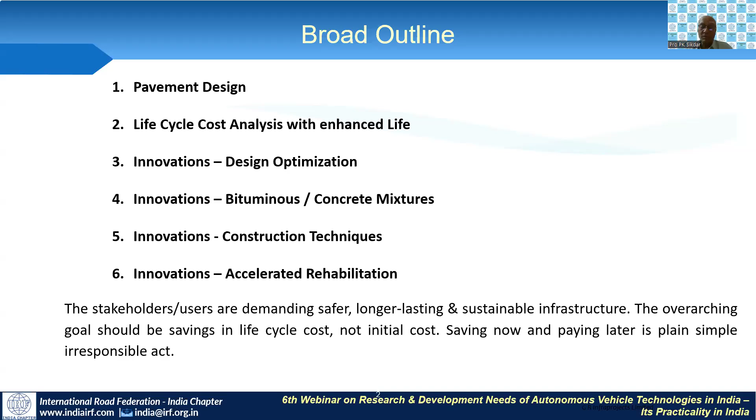There is a paradigm shift, it appears, that we are thinking only of economizing the initial cost of construction, regardless of the life cycle cost. We should not do that. Saving now and paying later is a plain, simple, irresponsible act. So we should be responsible engineers and think of the life cycle cost instead of the initial savings in the cost of pavement.

So in 2001, the ME design approach incorporating material properties came in, and we started using stabilized pavements in 2010, then in 2013 use of alternative materials, then 2014 use of falling weight deflectometer. That's how the upgradation in pavement technologies went.

In 2014, we started using the foam bitumen technology, then in 2015 the use of RAP, though in a small scale, using small dosages, it came in, then cold recycling, hot recycling came in 2015 only. Then in 2019, expansion in the usage of geosynthetics when IRC SP 59 was revised and came in.

Then in 2019 only we started the construction of long life or perpetual pavement. Then in 2022, we started the construction of high dosage RAP. Till date we had been thinking about up to 30% recycling, but then we started recycling 50% to 60% in hot recycling. And in flexible pavement, the geosynthetic reinforced pavement and bonded rigid pavement got constructed successfully from 2022 onwards.

Now the latest practices under construction, we have almost forgotten the conventional pavement of BC, DBM, WMM and GSB, that is almost a gone era now. Now what we have is high RAP dosage, that's the recycled DBM. BC we are not yet recycling, but recycled DBM under the flexible pavement system.

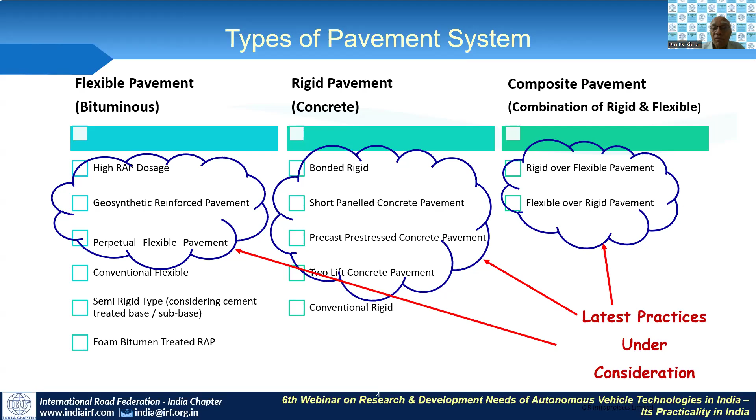Rigid pavement also, we are doing bonded rigid, then short panel concrete pavement, precast, pre-stressed concrete pavement, two-lift concrete pavement, besides the conventional rigid. Then composite pavement, we have rigid over flexible pavement, then flexible over rigid pavement. These are the combinations going on in the industry.

And there's an endeavor in pavement sustainability in terms of rehabilitation, because we are just building kilometers and kilometers of roadway, and widening also we need to take care of. Rehabilitation during widening needs to be taken care of, as Professor Veeraragavan mentioned, that widening like 4 to 6 laning, 6 to 8 laning, 2 laning to 4 laning or 6 laning, this should be taken care of with a holistic approach towards rehabilitation of the existing lanes also.

So we have bituminous on bituminous pavement, that's IRC 115, concrete on concrete IRC SP 17, a whole lot of codes are there. IRC SP 76 on concrete on bituminous, then bituminous on concrete pavement is under development. I just drafted the code yesterday and sent it to IRC. Hopefully it will come through. Cement grouted bituminous macadam, that's IRC SP 125, reinforced overlay using geosynthetics SP 59, then microsurfacing SP 81.

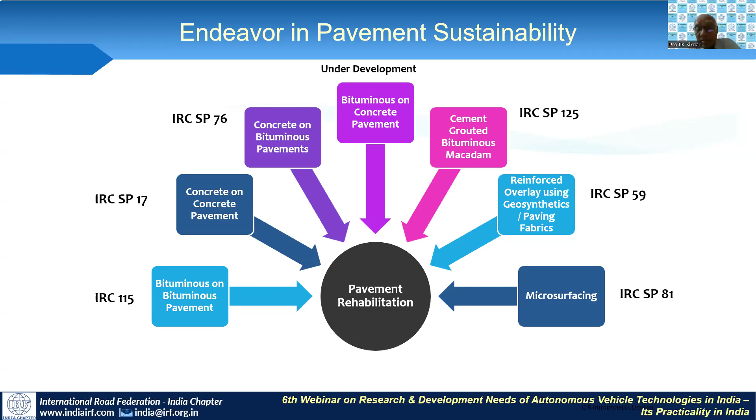Now coming towards the design aspect. Are we attacking everything with a holistic approach? Well, let us delve a little bit. January 2024 traffic data we have, and we have supportive traffic data also. Let's study one of the vehicles plying on Indian roads in the states of UP, Bihar, Chhattisgarh and so on.

It's a sand commodity, and the vehicle type of multi-axle vehicle is 1.22.22, and I have shown in the figure also, it's a 5-axle tractor semi-trailer. So the load it is carrying is like 96 tons, and the VDF which is coming is 131.68.

Is our flexible pavement capable of taking these high VDFs? No, our design is not catered towards designing such a pavement which has a VDF of 131.68. And what is the legal axle load limit? If we go by the legal axle load limit for this same truck, it is 8.77. So there are questions for many. Will our pavement, flexible pavement, or even for that matter perpetual pavement, sustain this kind of loading?

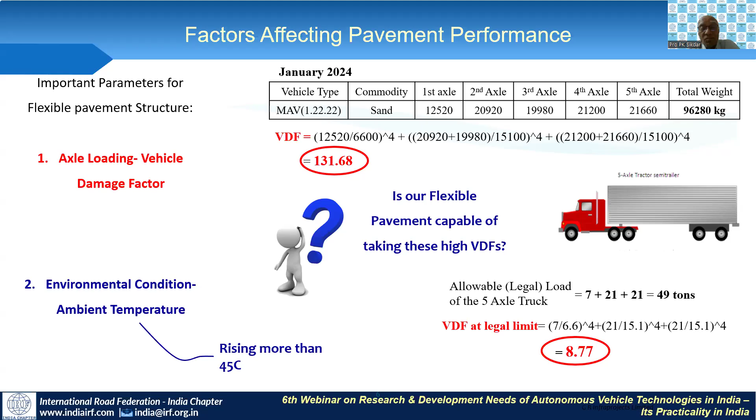And parallelly, the environmental condition like ambient temperature is rising more than 45 degrees centigrade. So there are so many areas where we need guidance from the academia.

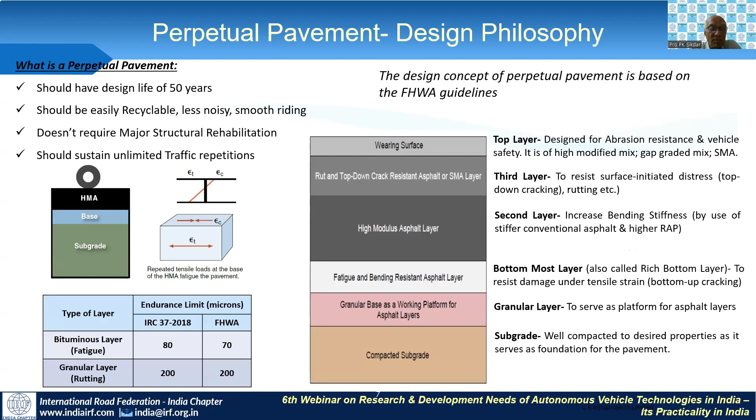The perpetual pavement design philosophy won't be covered in much depth here, since the next lecture from Professor Nikhil Saboo will already cover this. But again, we don't have any instrumentation done in India. These microstrain endurance limits have been fixed based on foreign countries, giving some attention to the overloading factor, but not necessarily as per instrumentation done in India. So in the name of perpetual pavements, many types have been constructed in India since 2019, and more innovations are coming.

These perpetual pavements aren't exclusive to India, but we Indians are really innovative. But are these actually truly perpetual pavements? Well, this will be covered in the next lecture. But why have we been innovative? Let me walk you through the cost.

The main components are the wearing course, then binder base course, and we have 3 layers of bituminous courses. Then we should have the WMM, that's the granular base course, and then the granular sub-base course, the subgrade. This is what should go on as a perpetual pavement across the world and across India as well.

But we have been innovative. We have made CTSB, the GSB, as a cemented layer. We have been further innovative, and constructed the WMM as CTB also. So it has come down to only the wearing coat, then only 2 layers of DBM, and then the CTB, the CTSB, the subgrade. Well, is it truly a perpetual pavement?

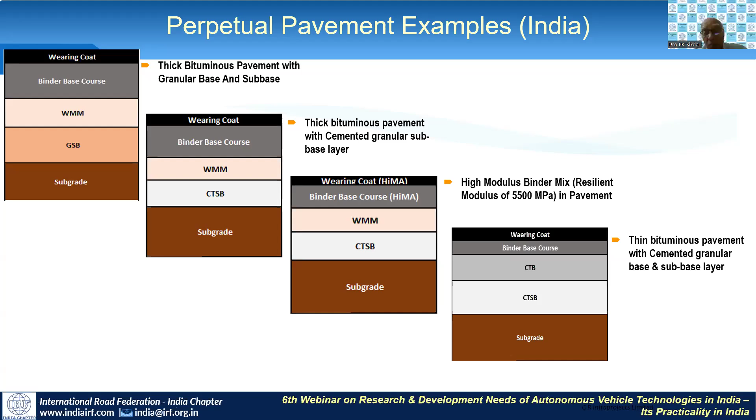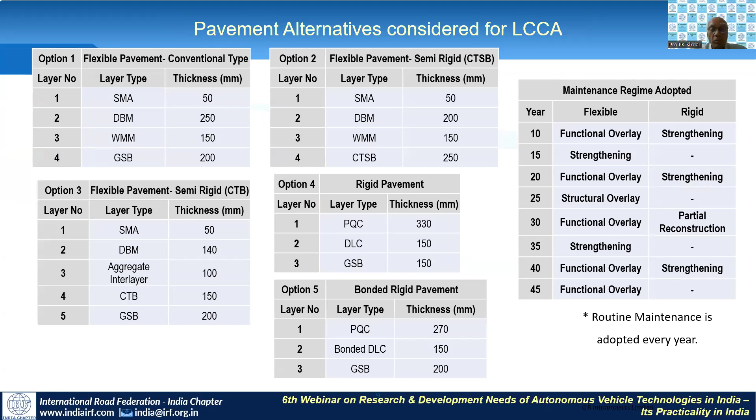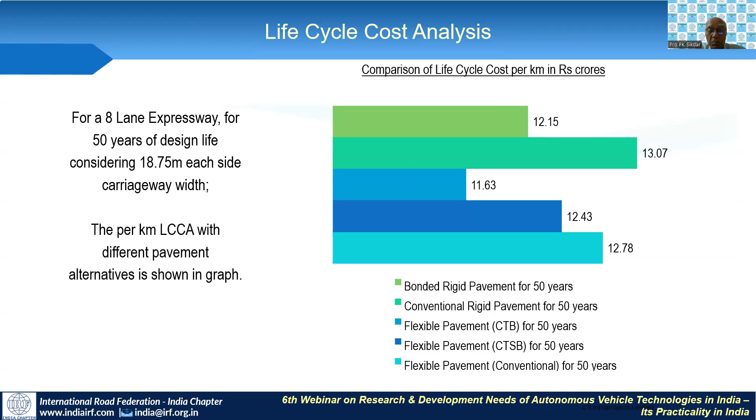And then the bonded rigid pavement for 50 years, conventional rigid, flexible pavement with CTB, flexible pavement with CTSB, flexible pavement conventional. Comparing all of this, we see that the CTB, CTSB layer, the innovative layer, comes out to be the cheapest. And that's why people went for a perpetual pavement with this configuration, because even in life cycle cost, it came out to be the cheapest.

Now comparing initial cost and life cycle cost, because we should be more attentive towards the life cycle cost rather than the initial cost. Again, this is the cheapest. In initial cost of construction also, we have the innovative perpetual pavement with CTB and CTSB as the cheapest, the third one from top, with 262.25 crores. So people went for it.

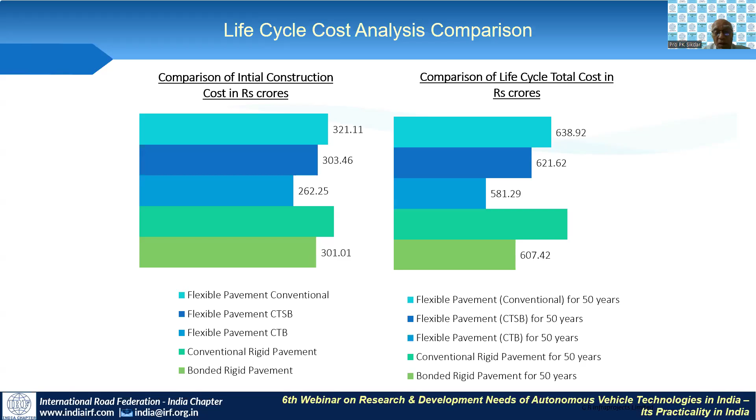Now coming to the quality tests we have done on these, we followed a strict quality regime for the success of these pavements. It's not easy to construct SMA because technical know-how was very limited when we constructed these pavements, but we made it a success, and till now they are performing well.

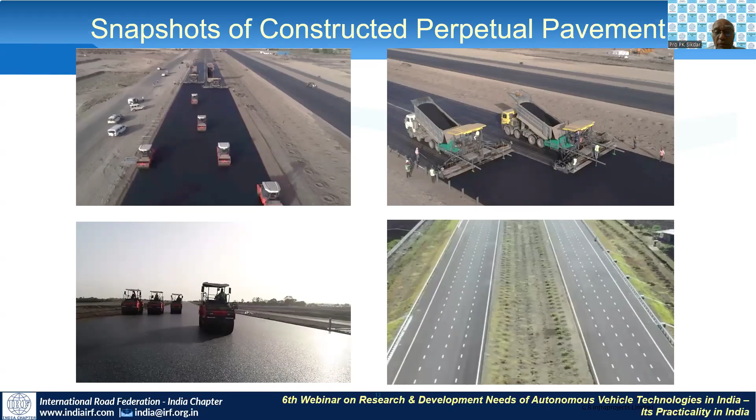Now coming to the next type of pavement, which is the geosynthetic reinforced flexible pavement. When we moved out from the conventional system of BC, DBM, WMM, GSB, the cheapest option other than that, for any type of pavement, not just perpetual pavement, came out to be BC, DBM, WMM, and CTSB.

That's the semi-rigid form. But these days we have another cheaper version, with BC, DBM, reinforced WMM, and then GSB. But yet again, another cheaper version came out, which is BC, DBM, reinforced WMM, and then CTSB. But are these pavements again true to the sense of meeting the service life and design life? Well, time will tell, because we don't have long-term performance data in India yet.

The design concept of the geosynthetic reinforced pavement is the same as that of the conventional pavement system, but with the introduction of the geogrid, we are giving some form of lateral restraint, improving the bearing capacity, and easing out the load transfer in a wider base.

The granular base of the WMM layer is weak in tension, or it cannot take tension. So we are introducing a tensile element, the geosynthetic or biaxial geogrid, so that it can resist the forces. That is what it is doing.

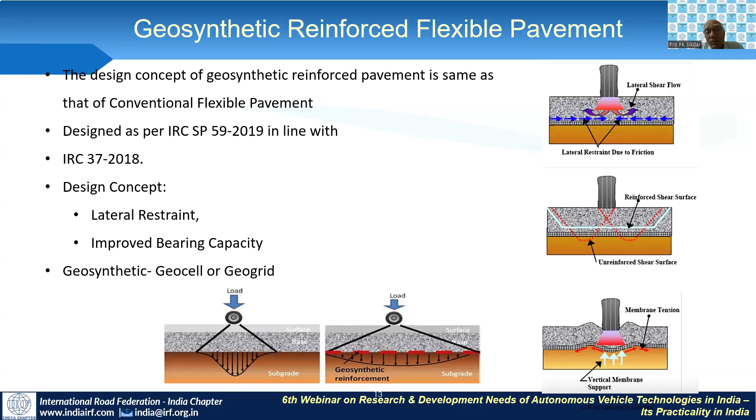But whether it was the true essence of design, well, time will tell, because the performance history is still not there. So what is the construction procedure of the geosynthetic reinforced WMM layer?

Usually, when the economics work out, it is laid in between the GSB layer and the WMM layer. So the procedure is: preparation of GSB for placement of the geogrid, then placement of the biaxial geogrid layer over the prepared GSB, then nailing of J-hook pins to keep the geogrid in position, then laying and compaction of the WMM layer.

Sometimes wrinkles form, and we have to either lay the WMM in 2 layers or be innovative to work with the wrinkles if they form. Then we have the compacted WMM layer, and the rest of the construction is like normal conventional pavement.

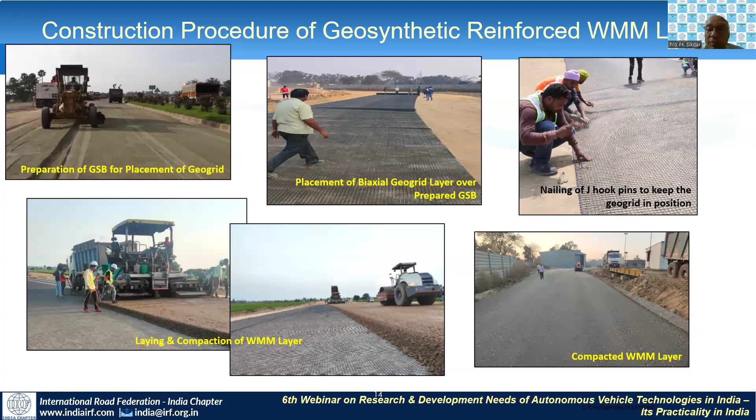So what is the quality assurance test plan during construction of the geogrid reinforced pavement that we must have, which is being neglected in the industry these days?

Plate load test should be done at the points marked, like the red points I've marked. There should be a control section, and we compare when we get the values of the MR of the control section, and then we introduce the geogrid in the reinforced sections. If we have one layer of geogrid in between the WMM and the CTSB on the left side, we have to measure the plate load test results at 3 points.

When we have 2 layers of geogrid, say our subgrade is poor as well, we can improve the CBR value as well. Then again we need to conduct the plate load test at 3 points. And we repeat this during the execution process also.

Sometimes we may not have the same quality of geogrid supplied to site, and the MI value, the modulus improvement value, may vary. So we need to keep doing this quality checking all the time during execution, to check if our design meets the execution parameters or not. That is a stepping stone towards performance, and if we don't do it, our performance may be hampered.

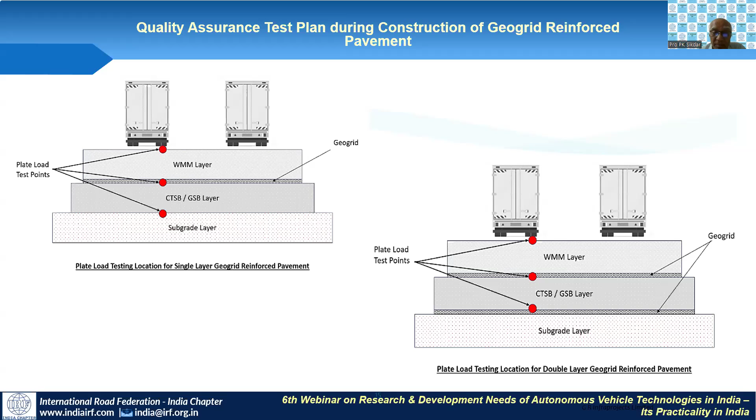Now coming to high RAP dosage by hot in-plant recycling. As I said, from 2022 onwards, recycling of more than 30% came into being, because nowadays the HMP plant produces bituminous mixes with fresh aggregates or a mix of fresh and RAPM, that's the recycled or reclaimed asphalt pavement material.

In India, bituminous mixes are produced with a ratio of 70 to 30. As I said, 70 to 30 is the norm, and with normal plants we can produce this. High RAP is still not regular engineering in India due to the special bituminous batching plant requirement. Based on the intended dosage and type of recycling, different plant setups are available.

If we want to recycle 60% of the existing material, that's usually for a brownfield project, it normally won't happen for greenfield projects. But if it is a brownfield widening project, then we will have ample reclaimed asphalt material available from the existing bituminous surfacing.

What happens is that we have to engage one parallel flow drum, so that we heat up the RAP separately.

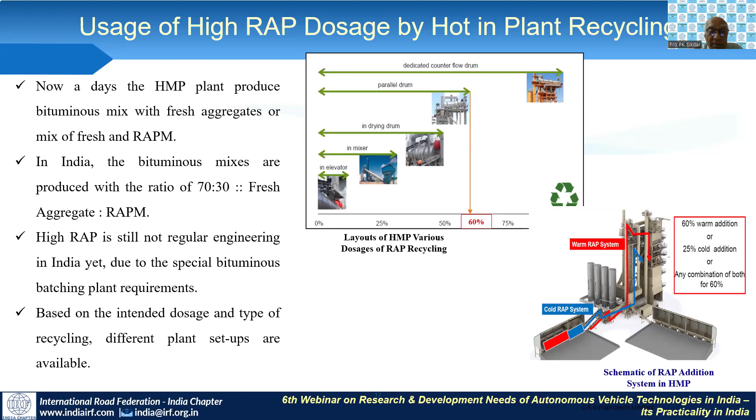This is the process we follow for usage of high RAP dosage by hot in-plant recycling. First of all, two-step milling has to be adopted, not necessarily always, but if you have a thicker existing pavement, then you follow two-step milling. The first milling is done on the top 50 mm bituminous concrete, and the other milling is done in the bottom bituminous base course, usually 100 mm or more or less.

The milling from the pavement layers is further screened into sizes and stored in bins. Storage bin and RAP storage management has to be done very meticulously, so that there is no moisture ingress. Steps for a quality RAP product: two-step milling, then crush or screen the RAP, stockpile the RAP, test the RAP as stockpiled, use the RAP, then test the RAP as consumed.

There are so many steps if we want to recycle. For milling drums also, for two-stage milling, we use fine milling with micro-fine milling drums and coarse milling with standard milling drums.

What we do is RAP is heated in a different barrel, like the parallel drum used for high RAP mixes. Then the heated RAP is added with heated virgin aggregate in the pug mill. They do not mix beforehand; they are transported through different conveyor belts and heated at different temperatures in different barrels, and they mix at the pug mill.

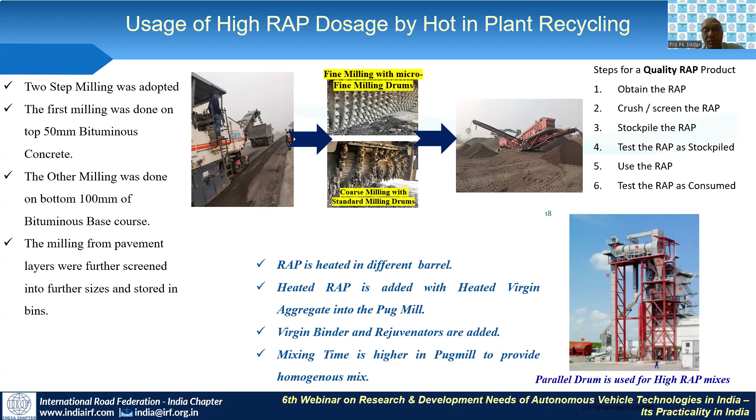Virgin binder and rejuvenators are added in the pug mill only, and mixing time is higher in the pug mill to provide a homogeneous mix. Normally, when we are not recycling, the mixing time in the pug mill is usually 18 to 20 seconds. But if we are using high dosage, 60% old materials, then the mixing time has to be increased to about 30 seconds, to give good time for the existing materials in the pug mill, for the rejuvenator to do its work.

Now the flowchart: this is where the distressed pavement is there. Not necessarily it has to be distressed, because when we are widening, it may be good material. We can get some fresh materials as well.

Then milling of the distressed pavement or existing pavement, then screening of the milled material, then stockpiling the RAP, laboratory testing and mix design has to be done meticulously. Then plant production, transportation of mixes, laying and compaction, and freshly laid pavement.

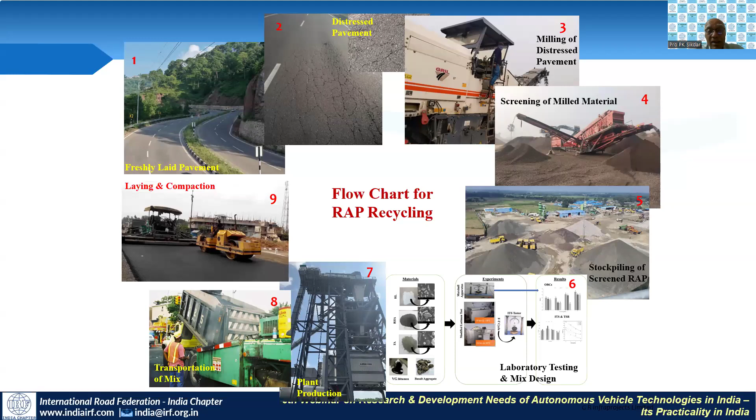There are some temperature categories that need to be followed when doing all this recycling process. IRC 120 doesn't cover everything, but it touches upon many of the things. We need to upgrade 120 also based on our experiences soon.

These are some pictures of where we laid the trial patch, and under the guidance of Professor Nikhil Saboo, he did the mix design, the high dosage RAP design for us. We can say it looks as good as a new surface.

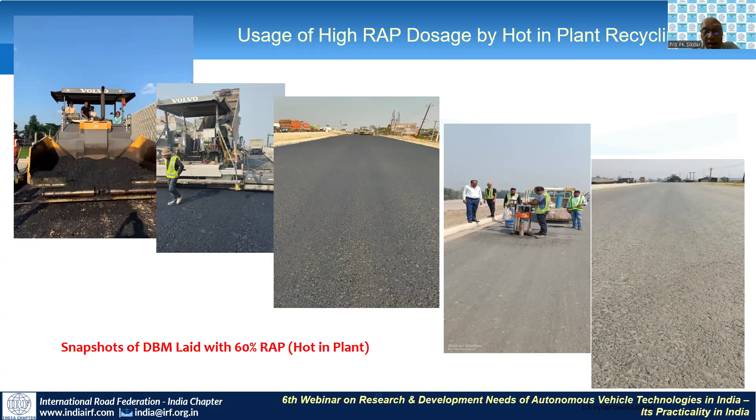You can see from the third picture that there is no difference, as if it is a fresh material. It's a very good surface that ran traffic for 1 year before we laid BC. There is no problem at all.

Now coming a little bit to cost comparison for the conventional process, I'll rush a bit due to time. In essence, the advantage of the separate mixing plant is that the bitumen film will not be overheated and damaged. Recycling temperature at the dryer outlet is around 130 degrees centigrade, and use of the screen is not affected.

So the essence is that for 60% dosage recycling, you need to spend a little on the plant. For this parallel flow drum, you need to invest about 5 to 6 crores. But there is an ultimate gain: you need not buy 60% of your aggregates, as they will be your fresh purchase. We can reduce the bitumen content from 4% down to about 2.2% fresh bitumen purchase. So ultimately, savings per ton of mix production to the tune of 700 to 800 may be expected, depending on the aggregate price.

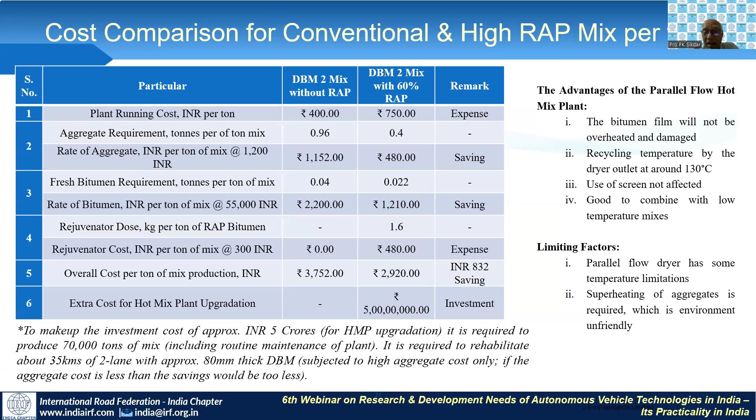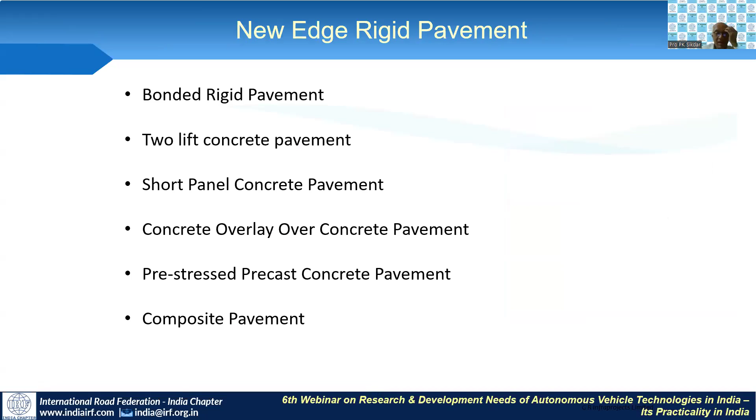Now, coming to the new age rigid pavements, we have constructed bonded rigid pavement. Two lift concrete pavement is in the planning. Short panel concrete pavement also we have laid. Then concrete overlay over concrete pavement, pre-stressed precast concrete pavement, composite pavement. These are the new age rigid pavements now.

Now, conventionally the rigid pavement we have mostly seen throughout is 300 mm of PQC, DLC is 150 mm, GSB is 150 mm, and the panel size is like 4.5 meter by 3.5 meter.

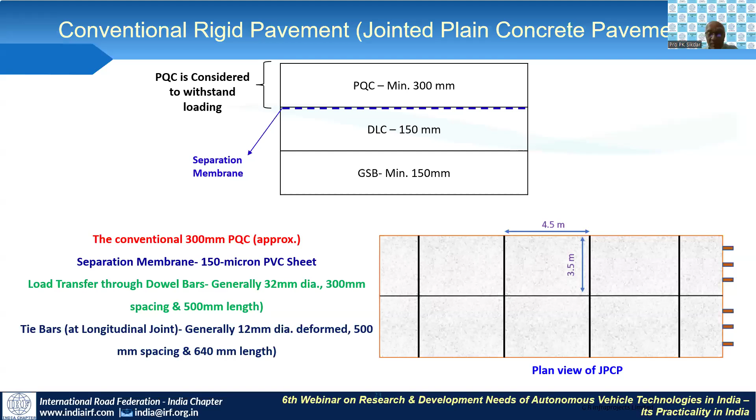Now, what is the bonded rigid pavement? What we are doing is that instead of DLC and GSB, DLC, GSB, and subgrade considered as the foundation for a conventional rigid pavement. But for a bonded rigid pavement, GSB and subgrade are considered as the foundation.

And because PQC and DLC are mechanically bonded to behave monolithically, we can economize on the PQC thickness by 60 mm. It depends on design. It could be 60 mm, 70 mm, 80 mm. It's not that it necessarily gives an economical pavement design, but it definitely saves the cost of the cement and all.

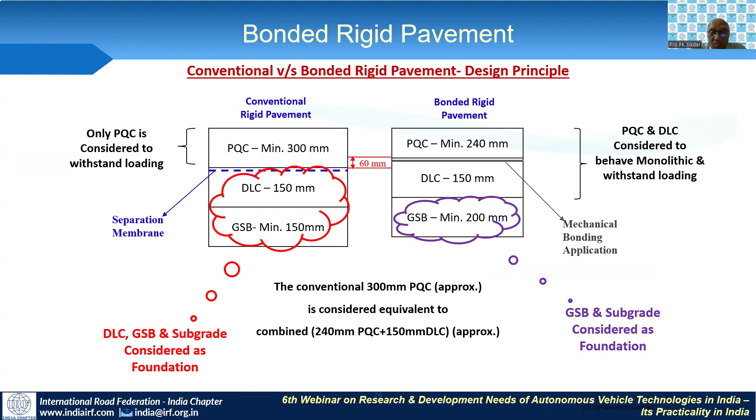So preparation of the GSB bed, this is the methodology. The methodology of construction of bonded rigid pavement is most important. And after the preparation of the GSB.

Your voice is breaking. I mean, it's not continuous.

The internet is a little bit unstable. Sir, is it okay now? There's a breakage. Yeah, yeah.

It's okay. Then we do the joint cutting and sealing in the DLC, which is not there in the case of the conventional pavement. Then the laying of the PQC, and in the PQC, we match the joints exactly in the same location where we have cut the joints in the DLC. This is very important. Otherwise, bonded rigid pavement won't be a success.

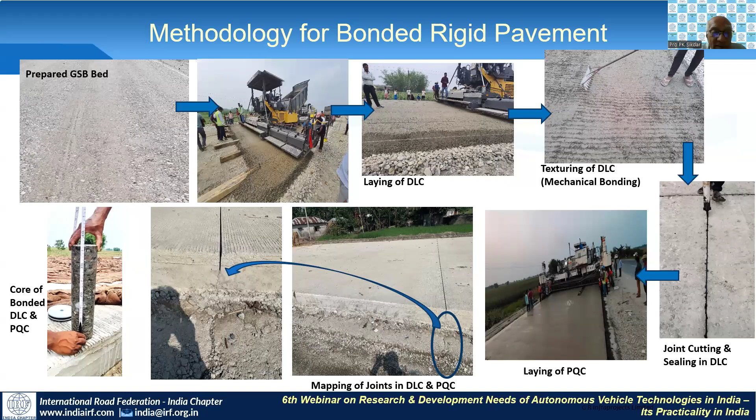Now, these are some of the constructed pictures. We cannot make out from the core which one is M15 grade of concrete and which one is M40 grade of concrete. If the bonding is good, you cannot even make out.

And coming to the short panel concrete pavement, I won't say that you can economize, but again, there will be a saving in terms of environment, because the M40 PQC will come as 260 mm and the panel sizes will be 1 meter by 1 meter.

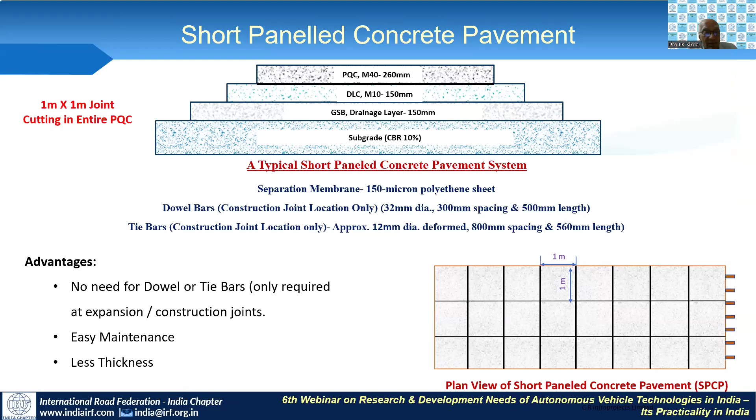What are the advantages? No need for dowel or tie bars, only required at expansion or construction joints, easy maintenance, less thickness. But the only disadvantage is that if you lay 300 of short panel concrete pavement in a day, then joint cutting machines have to be doubled. If you were needing like 5 cutting machines, you would need now 10 cutting machines to do the timely joint cutting because of the 1 meter by 1 meter panels.

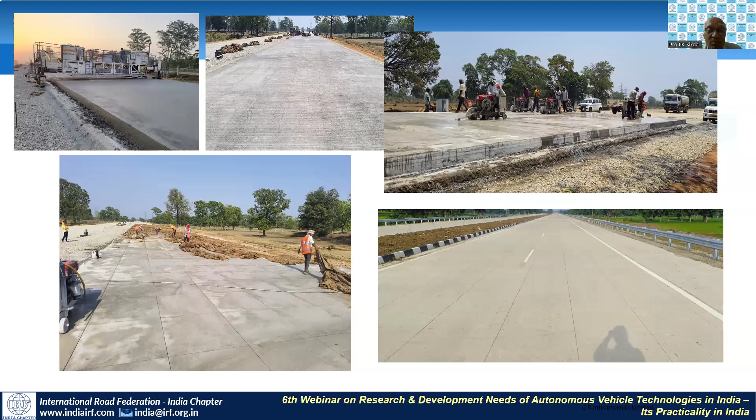But again, steel is saved here. So this is the short panel concrete pavement.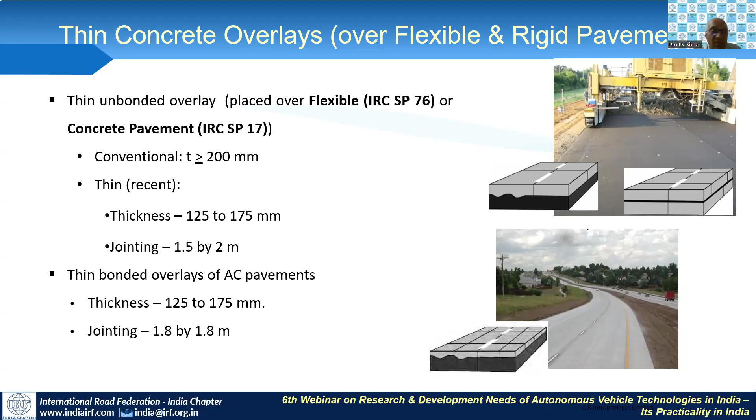Now, coming to the thin concrete overlays for flexible and rigid pavement, we have white topping, and we can construct thin concrete overlay both on flexible pavements and rigid pavements. In some of the RFPs now, it is coming with white topping in terms of rehabilitation. We haven't constructed it yet, but this is very much prominent in Maharashtra and in Bangalore, it has been constructed. Now, these are some snapshots of unbonded overlay over existing concrete pavement with fabric interlayer.

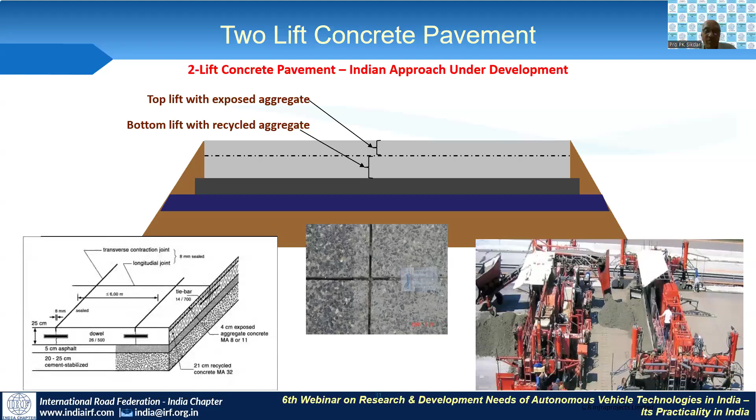And two-lift concrete pavement is to maximize the use of recycled material, as I said, we are doing with the high dosage RAP in DBM. So we are thinking to use these materials in concrete pavement as well.

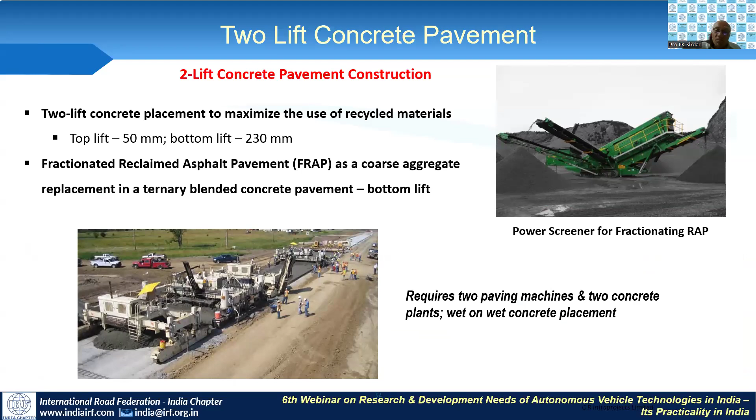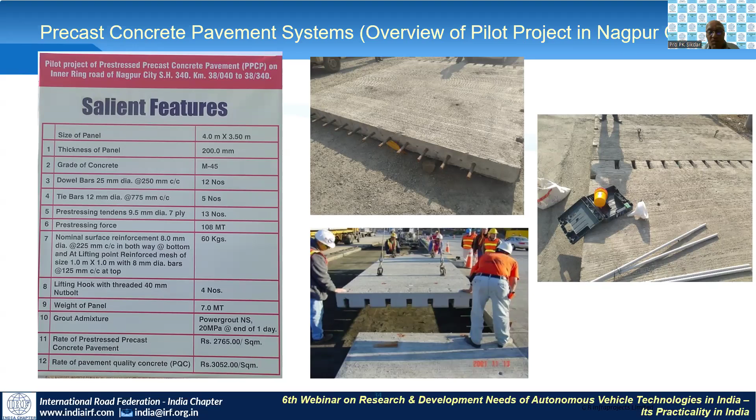Now, precast concrete pavement technology. Again, this is an expensive thing, but in built-up areas, some areas in Nagpur and all, it has been constructed. The precast concrete pavement requires precision work because of maintaining the camber and all. We are still thinking whether to engage the precast concrete pavement somewhere or not.

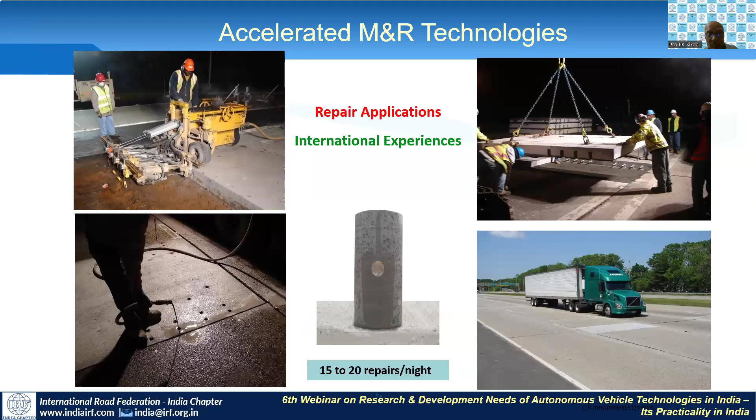And now, accelerated maintenance and rehabilitation technologies, it is being used internationally, the experiences are there. Where repairs are needed, we can go for these precast pre-stressed concrete pavements.

And so that's all. Hope I maintained the time. That's all from my side.

Thank you, Atasi. I think you have shared a wide variety of new materials and technologies that are used. Perhaps I would have expected your sharing of experiences of the perpetual pavement constructed by GR and the issues and challenges. That is what we are looking forward. Anyhow, he has shared a wide variety of materials and technology that can be adopted. However, the issues of maintenance, preservation, management, lifecycle cost for all the technologies will be a real challenge.

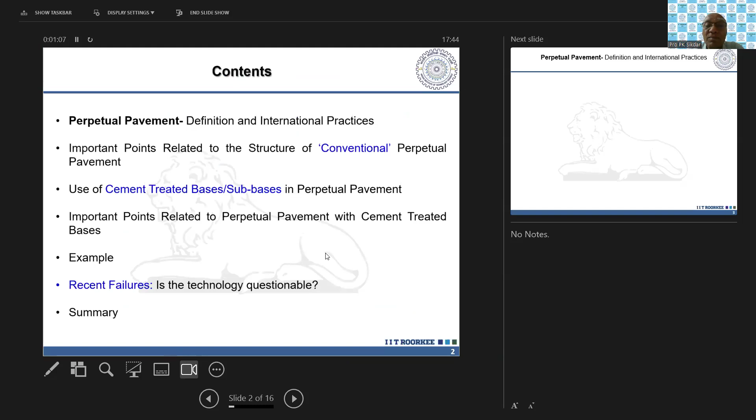Let us first recall the basic definition of perpetual pavement. Professor Veeraragavan already defined it in the beginning. In very simple terms, a perpetual pavement is a pavement which will have a design life of more than 50 years. Now, what does this mean? It essentially means that the choice of pavement crust should be such that it can take a significant amount of traffic repetitions before showing distresses beyond critical limits. Such pavements ideally should require only minor maintenance activities in the top few inches of the wearing course during the entire in-service life of the pavement.

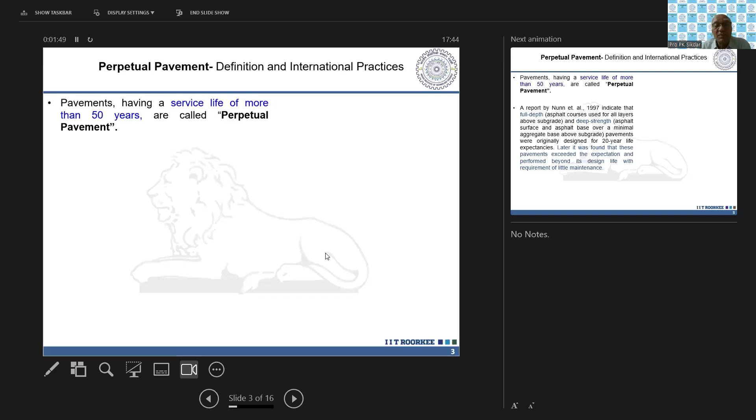Some other terminologies used for perpetual pavement in the literature are full depth pavement and deep strength pavement. It is interesting to note that the conceptualization of perpetual pavement started as empirical experiments. The endurance limit which we talk about today was not established during the first construction of perpetual pavement. Those pavements which were designed for a 20-year life, researchers observed, started giving performance beyond their expected life. That initiated the research to develop design methodologies for perpetual pavement.

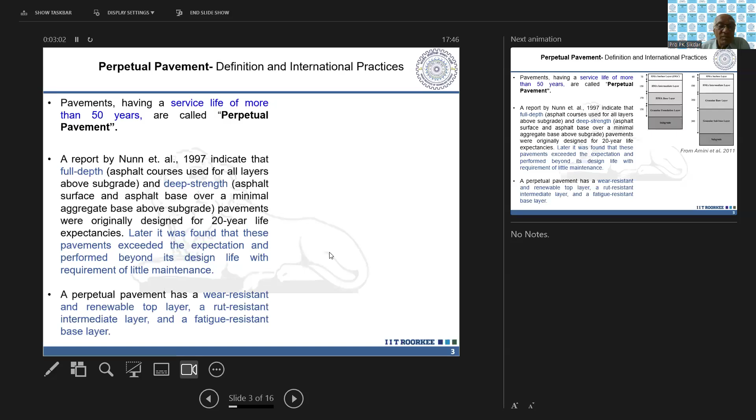Typically, a perpetual pavement will have a wear resistant and renewable top layer. It will have a rut resistant intermediate layer and a fatigue resistant base bituminous layer. This means that we will have three bituminous layers sitting at the top of either only subgrade or some minimum depth of granular layers. It should be noted that the role of the granular layer here is primarily to facilitate drainage; its engagement in the structural capacity is minimal.

As you see in this picture, there is a comparison between the conventional pavement on the right hand side and the perpetual pavement on the left hand side. As shown, the total thickness of the bituminous layer in a perpetual pavement is typically more than 350 mm in most cases. Literature review indicates variability in the thicknesses, but what we have observed is that it is always more than 250 mm in general. I will show you this in the next slide.

Now, the decision on the thickness of the bituminous layer - whether it should be 250, 300, or 350 mm - is taken based on the limiting strain value at the bottom of the bituminous layer. Obviously, since the crust of a perpetual pavement has a very thick bituminous layer, its initial cost is much higher than the cost of a conventional flexible pavement.

Almost double for the construction of bituminous layer, in fact. But if you consider the life cycle cost, as shown from one of the literature, the cost of perpetual pavement is lower than the conventional pavement, considering the life cycle cost.

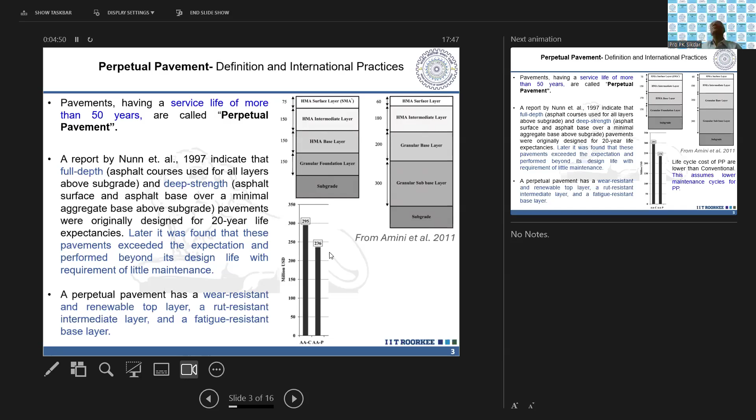Now, for HAM projects, that can be good news, as the contractor is responsible for maintaining the pavement for almost 15 to 20 years. However, it should be noted that it is assumed the perpetual pavement will require a lower maintenance cycle than the conventional pavement. So this is an assumption in the life cycle cost calculation. In case a perpetual pavement shows premature failure, it is not possible to extract the benefit of this overall cost reduction through the construction of perpetual pavement.

Now, some general facts related to the conventional perpetual pavement, based on the literature review, are as follows. If you look at the binder, typically polymer modified binder has been used in the wearing course. For example, in India, in the perpetual pavement, we prefer to use stone mastic asphalt, which is produced using polymer modified bitumen as per IRC SP 79.

The thickness design is based on critical tensile strain at the bottom of the bituminous layer. While globally 70 microstrain is recommended, as per IRC 37 we use 80 microstrain, considering that our average pavement temperature in India is 35 degrees Celsius, higher than the average temperature used globally, due to tropical climatic conditions. The vertical compressive strain at the top of subgrade is limited to 200 microstrain, which is similar to international practices.

Now, as I mentioned previously, the thickness of the bituminous layer varies from 250 mm to 500 mm. And the average thickness of the granular layer is limited to only 175 mm because it is primarily acting as a drainage layer. But it is not a mandatory requirement, obviously.

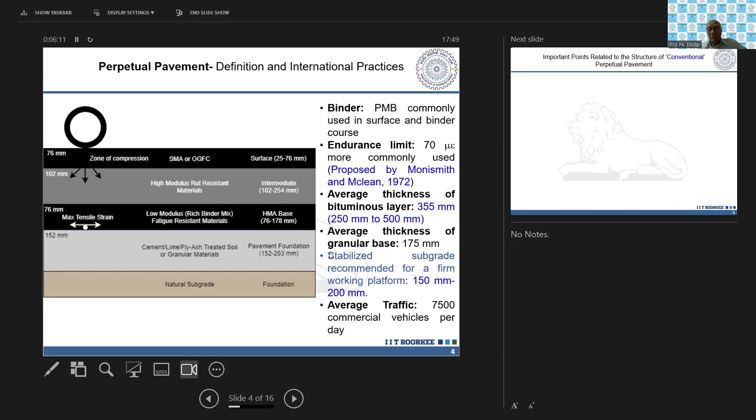So now I will walk you through two conditions as per Indian practices. We will talk about two choices of perpetual pavement: conventional perpetual pavement, and one with cement treated bases, which Ms. Atashi Das already showed. Now in the conventional approach, we consider that the main structural element in the entire pavement cross section is the thick set of bituminous layers.

There are three sets of bituminous layers here. Granular layer, as I said, is provided mostly for drainage. Now, for such a structure, the endurance limit has been tested by various researchers globally, and there is a general consensus on the limiting values, which are 80 microstrain or 70 microstrain and 200 microstrain.

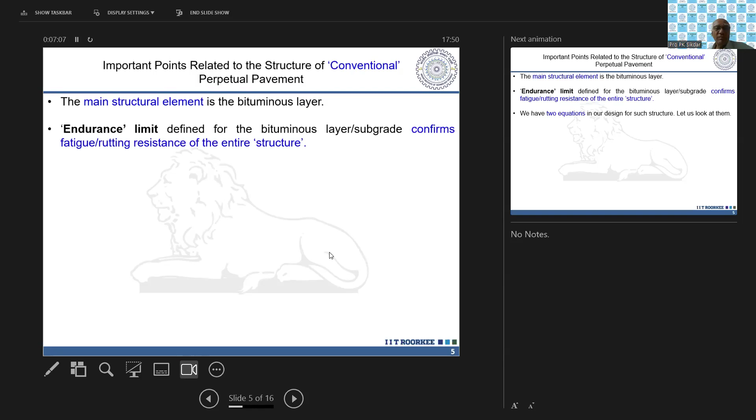There is no doubt that the entire structure can be called perpetual. This is important. So we have to remember that the definition of perpetuality is related to the structure of the pavement, not just the bituminous layer.

If you see IRC 37, we have two performance models which can be used in conjunction with IIT PAVE to estimate the crust thickness by ensuring that the actual strain below the bituminous layer and at the top of the subgrade is less than the critical values. So it can be easily done. So ideally, by definition, this pavement should never fail structurally.

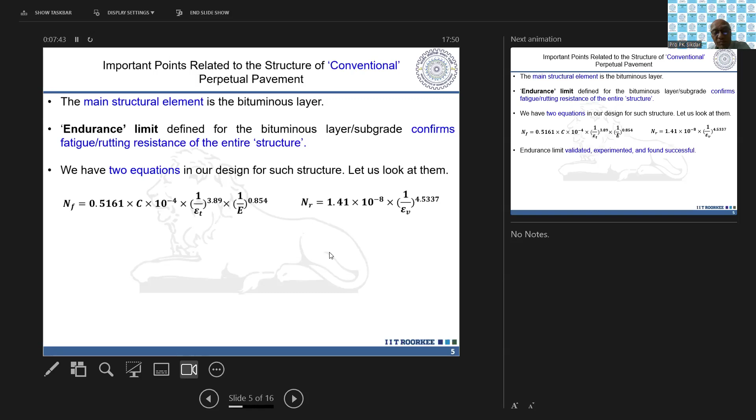This is our assumption. However, we have seen failures in the conventional perpetual pavement also. I will show you some of the pictures in the upcoming slides. In fact, forensic investigation worldwide has also shown that perpetual pavement can sometimes show premature distresses.

So what are the forms of these distresses in the conventional perpetual pavement? It can be in the form of rutting in the top wearing course. This can be in the form of either shear failure or top-down cracking, not bottom-up cracking. If the compaction of the top layers is not appropriate, which is one of the reasons our Indian perpetual pavement has failed in the recent past...

Water can infiltrate, it can get trapped within the bituminous layer or at the interfaces of the bituminous layers, which can lead to generation of pore water pressure and very high shear stresses at the interface, leading to premature failure. So we have to be careful about these aspects.

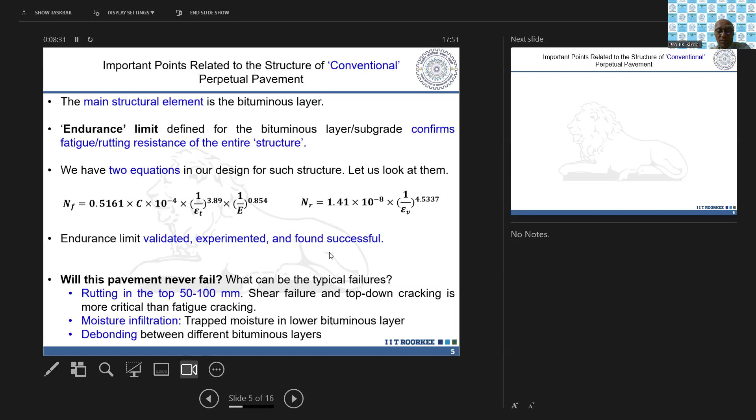However, in India, unfortunately, we do not account for these variables in our design. Shear failure, we do not account for in bituminous mixes. We do not account for top-down cracking. We just have a criteria of incorporating this aspect in the mix design.

Moisture-related failure in one or more layers is not accounted for, and of course, construction-related failure is also not accounted for in the design. But these can happen at the site.

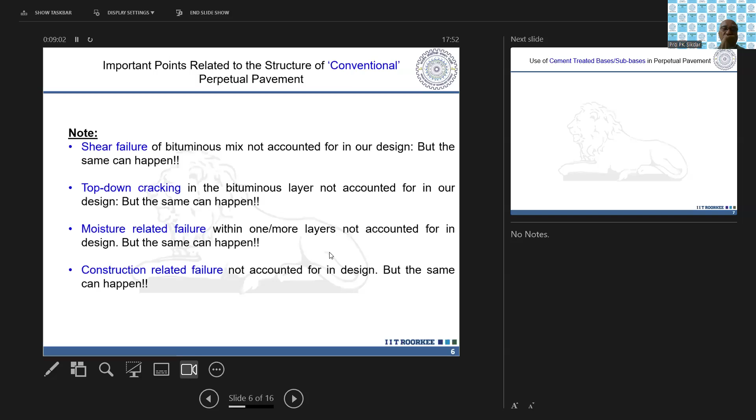Now let us talk about the design of perpetual pavement using cement treated base. As pointed out, that can be a very catchy option for contractors because the cost reduces, thickness reduces. So what contractors have been doing and how they have been designing, let us look into that.

Now here, the resilient modulus of the CTB is taken as 5000 MPa, which is much higher than the stiffness of bituminous layer, which is in the range of 1500 to 3000 MPa. Now such pavements where a stiff layer is sandwiched between two relatively less stiff layers is called inverted pavement in the literature.

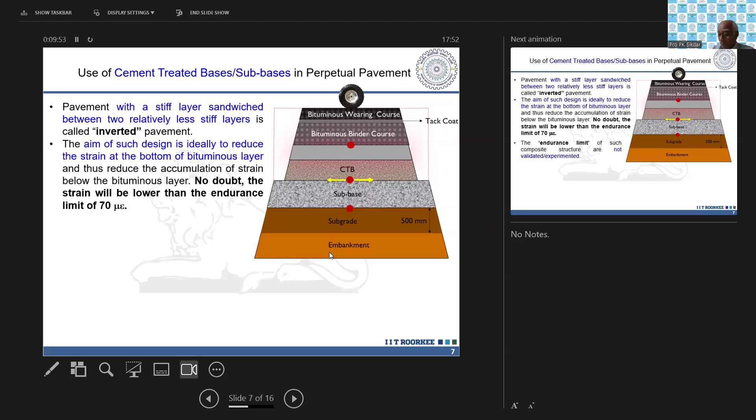What does inverted pavement comprise of or are made for? Such pavements tend to reduce the strain below the bituminous layer. So just imagine that when a load is applied, the CTB, being very stiff, gives an equally opposite reactive force. We have to imagine this.

This makes the top bituminous layer under compression and the bottom bituminous layer experiences compressive strain instead of tensile strain. Therefore, the ideal load carrying mechanism of a flexible pavement is not applicable here, which means that the load is not transferred from grain to grain as we typically assume in a conventional flexible pavement.

Now, if we look at the critical points of analysis as shown in this figure, in addition to the bottom of the bituminous layer and the top of the subgrade, we have another critical point at the bottom of the cement treated base. But the endurance limit of such pavement is not known so far.

We know the endurance limit of bituminous layer, we agree to that. We know the endurance limit at the top of subgrade, we agree to that, but we do not know the endurance limit of a cement-treated base layer so far, even in the literature.

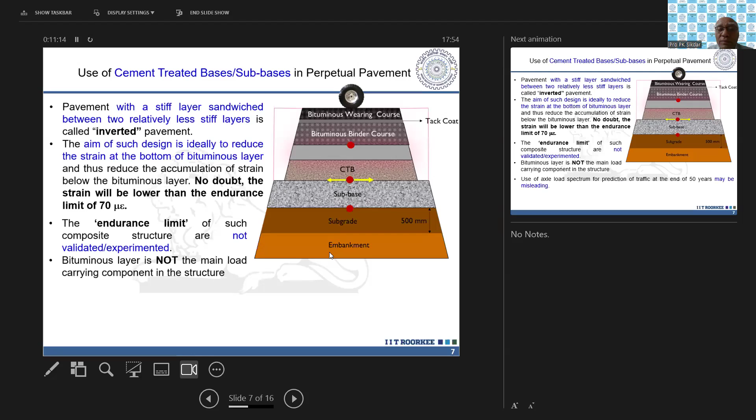Therefore, just using the axle load spectrum, assuming a hypothetical traffic growth rate, as was also pointed out by Professor Veeraragavan, and designing for 50 years can be misleading in this case. Additionally, such pavement also requires very high quality control in construction, especially related to curing and the amount of cement we add, and so on. So we need to be more careful here.

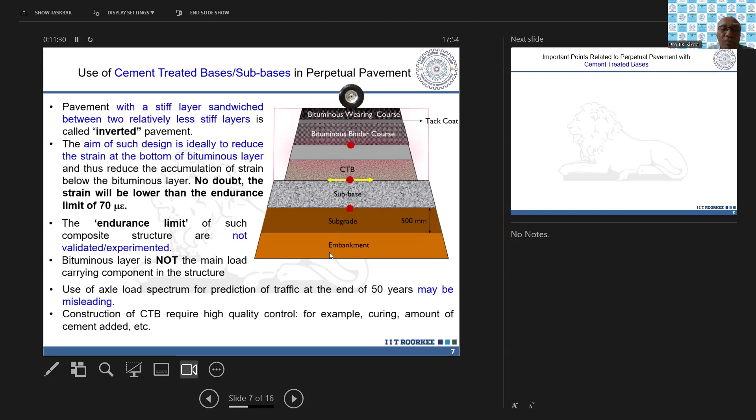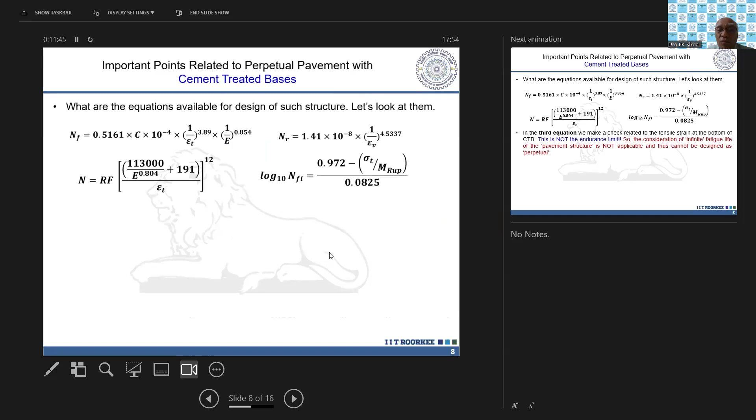Okay, so if we look at the equations again as per IRC 37, in addition to the fatigue and rutting equation, we have two equations for cement treated bases. Now I will just point out here the third equation. If you look at the third equation, we make a check to the tensile strain at the bottom of CTB.

This is not the endurance limit. This equation, which has been taken from foreign guidelines, is not based on an endurance limit equation. So the consideration of infinite fatigue life of the entire pavement structure is not applicable here, and it cannot be designed as a perpetual pavement. This is what I believe.

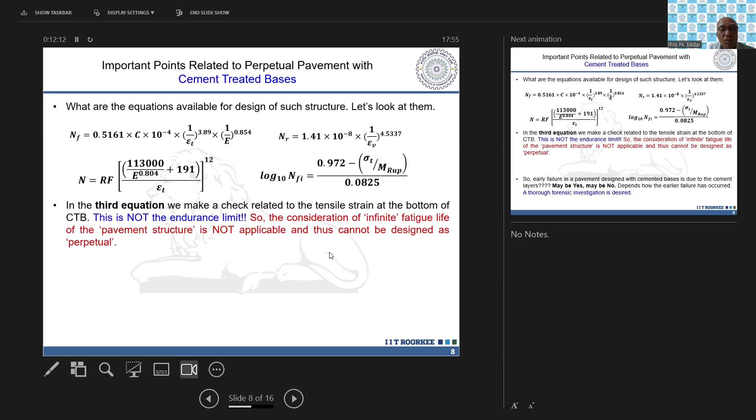So let's say a cement treated perpetual pavement shows failure. Can we say that this pavement has failed because of the presence of cement treated base? Well, maybe yes, but maybe no. It depends on how the failure has actually occurred. So we have to do a thorough forensic investigation for the same.

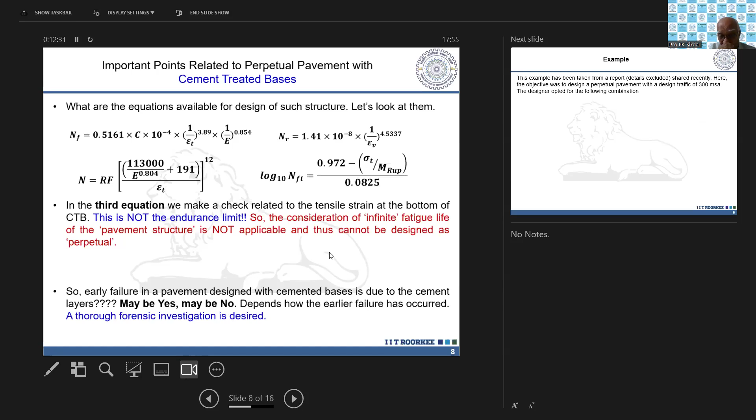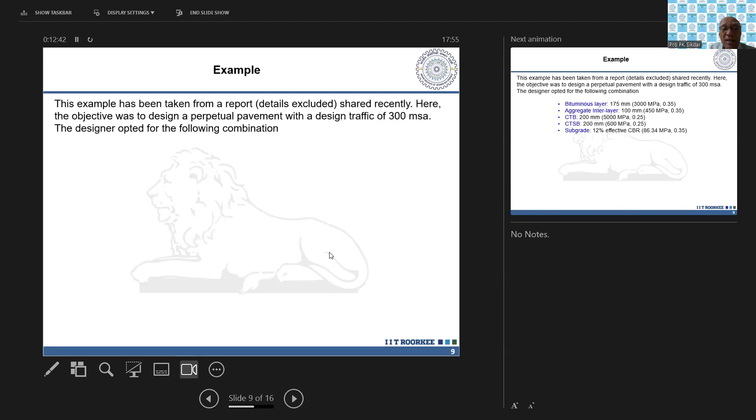Now I have taken a very good example from an actual report. Details have been excluded. This perpetual pavement was designed for 300 MSA. I have seen this report, I have seen the entire calculation. The contractor proposed use of a bituminous layer of 175 mm, aggregate interlayer of 100 mm, CTB of 200 mm, CTSB of 200 mm, and the subgrade CBR was 12% in the design.

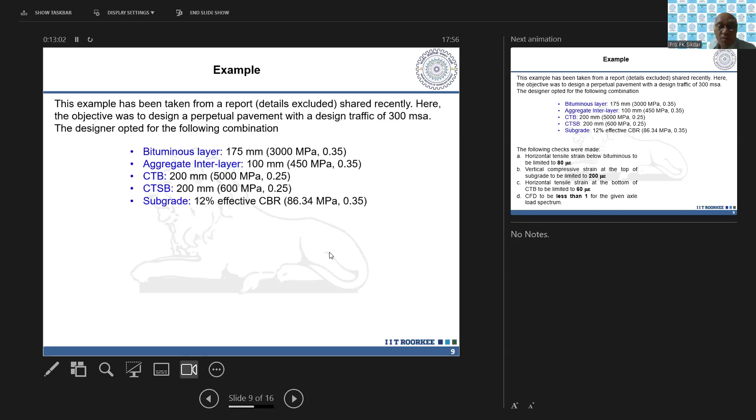I have checked the axle load spectrum data, I have checked the analysis. Horizontal tensile strain below the bituminous layer to be limited to 80 microns - it was valid here. Vertical compressive strain at the top of subgrade, 200 microns - it was correct.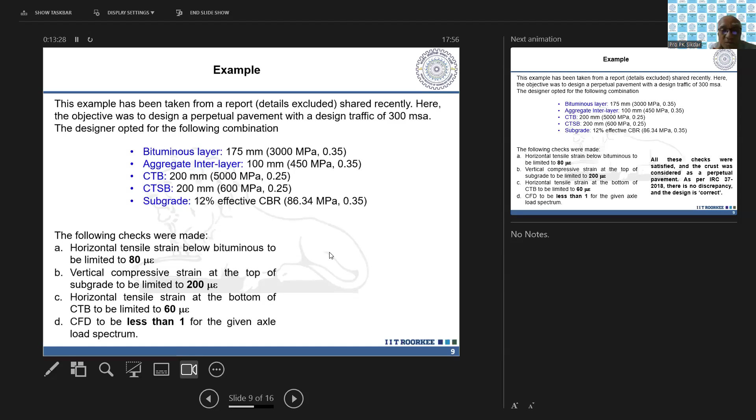Horizontal strain at the bottom of CTB to be limited to 60 microstrain based on the third equation, though that is not a perpetual value, but yes, it was valid as per IRC 37. Cumulative fatigue damage to be less than 1 - yes, it was valid. So all the checks were satisfied and the crust was considered perpetual as per IRC 37. So there is no discrepancy in the design, and the design is correct.

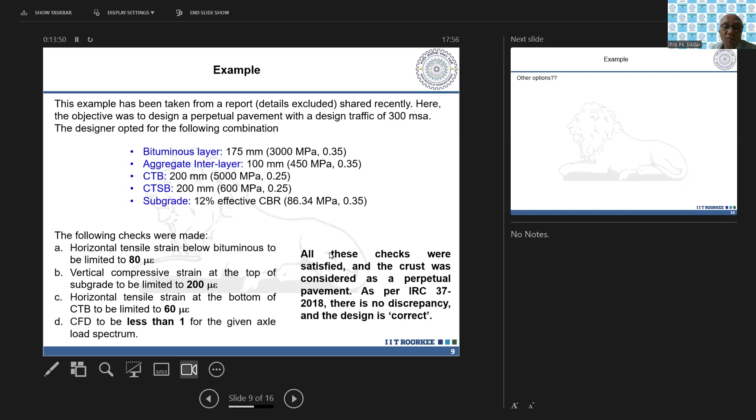But the important question which we have to ask here is, do we call this structure to be truly perpetual without the availability of data related to the endurance limit of the CTB layer?

Now, the same problem, if you try to explore other options, you can design the pavement in various ways. In fact, I could have designed the pavement with lower thickness than what the contractor provided. I could have reduced the thickness to only 150 mm of bituminous layer, and still the pavement would be safe in this case. However, the question here is, do we really call this pavement perpetual?

As per data available, the minimum thickness of bituminous layer in almost all the perpetual pavements used worldwide has been at least 250 mm, which they have not provided.

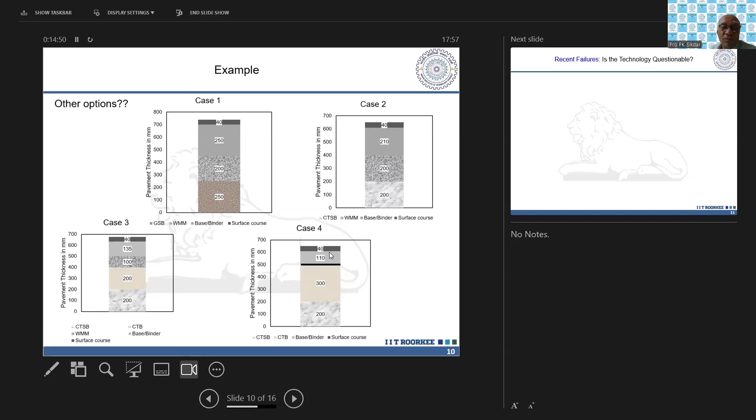Now I will show you some recent work. If you see the recent three expressways we have constructed in India with perpetual pavement: Delhi-Vadodara, constructed using a conventional approach; Delhi-Amritsar-Katra, again conventional approach; and Bangalore-Chennai with cement treated base. All these pavements have shown premature failure in different packages. Let us see some pictures.

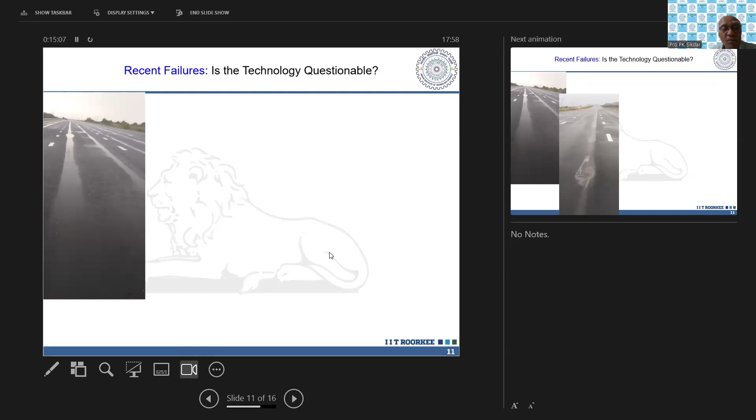No traffic has moved on the pavement, no significant traffic, yet premature failure. You can see rutted pavement on the wheel path and how the moisture has accumulated. Same picture from the site. You can see another type of distress occurring in the field, premature. Pavement has failed, despite being designed as perpetual.

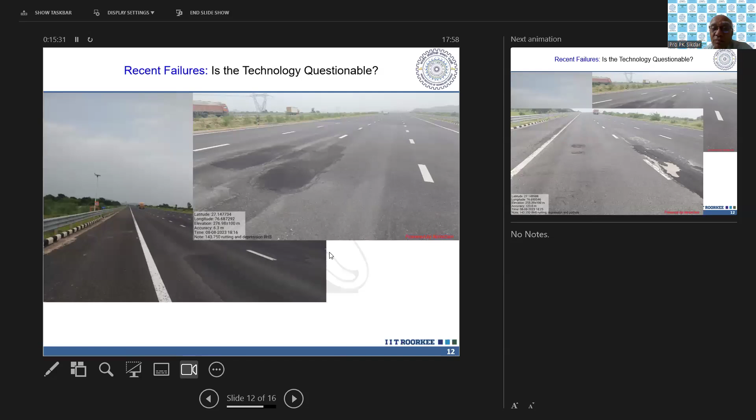If you see, patching work has been done, though the patching period should not have come so early here. Again, you can see some patching being done and distresses on the pavement, with further distresses visible. These are different packages, different expressways constructed using the concept of perpetual pavement.

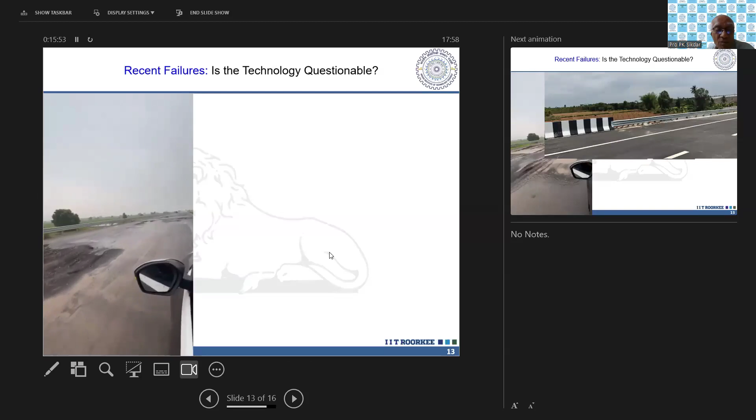There is a short video taken through a windshield survey. You can see how the pavement has drastically failed before even a significant amount of traffic has moved on it. Some patching work being done, segregation on the pavement, more patching, and cracks being filled, that too at a very early stage. So these are all failures.

Now why has this pavement failed? That is the question we have to answer. Why, being designed and constructed as a perpetual pavement, have they shown premature failure? In one discussion, we argued that probably the design was not correct. But even if the design is not correct, say even with a 100 mm bituminous layer, it should not have shown premature damage so early, before even traffic started to move. So recently we have observed that there is a lacuna of technical know-how in the country.

We are adopting all the best practices, no doubt about that. We are ready to implement them, no doubt about that. But the question is, do we really understand the difference in technologies? Let us say SMA. Ms. Atashi Das pointed out that SMA is a very special mix. Indeed, it is a special mix. We have seen that contractors are not aware of SMA's technical know-how. They use polymer modified bitumen in SMA.

They do not know at what temperature the mixes should be produced from the plant, or at what temperature they should be compacted. They believe that stone mastic asphalt or bituminous concrete mixtures using PMB can be compacted at 130 to 140 degrees, which is wrong. You cannot compact polymer modified bitumen that way. These days suppliers are using high dosages of polymers, 3 to 5%, sometimes more, to satisfy the requirements as per IRC SP 53 and IS 15462. But the mixing and compaction temperature is something no one is paying attention to.

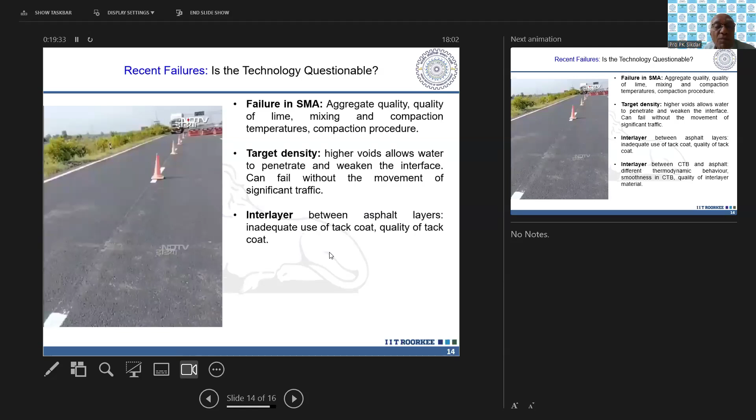This is more important when you have a bituminous layer over cement treated bases. The surface finish of a cement treated base is smooth, unlike WMM which has a rough finish. So if you are placing a very thin layer of bituminous material and expecting it to bond well with the top bituminous layer, it is really doubtful. Further research in India is required to adopt best practices for interlayer mechanisms in composite pavements.

Cement treated base and bituminous layers are thermodynamically different from each other. When temperature changes, their change in dimension is very different. So there is a high chance that the interlayer will weaken over a period of time. We have to pay attention to the type of interlayer material used. Probably a thick layer of polymer modified bitumen can be a better solution for the interlayer, especially with cement treated bases and a bituminous layer on top.

So this is what I have listed out, some of the lacuna in understanding and what we should pay attention to. I'm sure that if these small things can be controlled, all these technologies can definitely be successful.

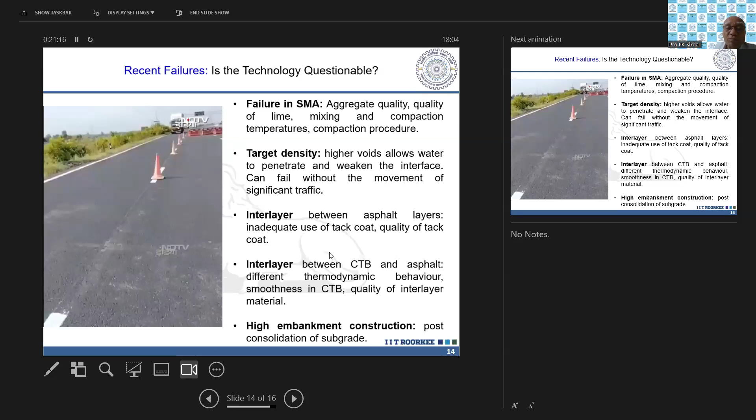Another important aspect we have observed recently, especially in expressways with high embankment construction, is that due to the speed of construction these days, no one is paying attention to consolidation in the subgrade soil. If the subgrade soil has not been compacted properly, especially in high embankments, secondary compaction happening later can cause the entire pavement to settle down. We have to be careful about this.

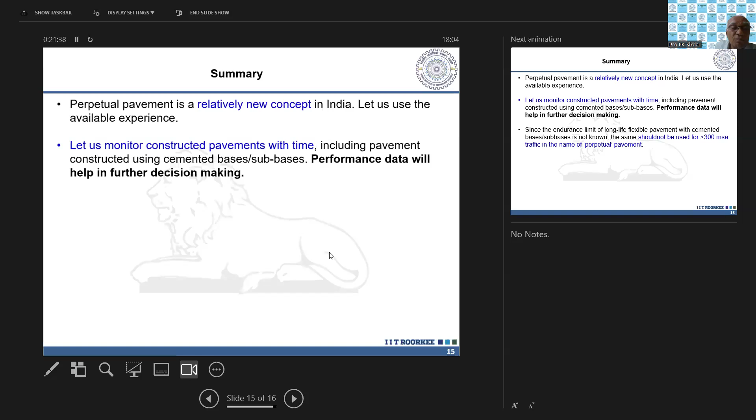In summary, perpetual pavement is a relatively new concept in India. Let us use the available experience and monitor the constructed pavements over time, including pavements using cement-treated bases. Performance data will help us in further decision making. Since the endurance limit of long life flexible pavement with cement-treated bases is not known, the Ministry has given a multi-institutional project where we are investigating the endurance limit of cement-treated bases.

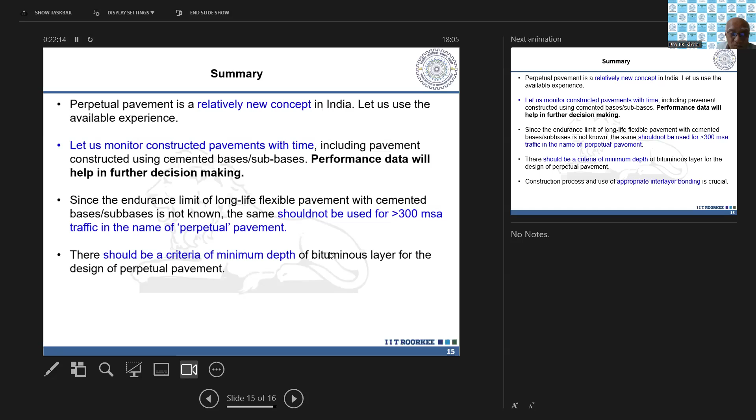Till then, it is just a recommendation that it should not be used for greater than 300 MSA traffic in the name of perpetuality. There should be a criteria, which I strongly believe is related to the minimum depth of bituminous layer. The contract document, the DPR, should specifically mention the minimum depth of bituminous layer for perpetual pavement, and it should be limited to at least 250 mm.

Construction process, and as I said, the use of appropriate interlayer bonding, is very crucial when you have multiple layers of different types of bituminous mixtures which are mechanically very different from each other, and whose response to loading is also very different.

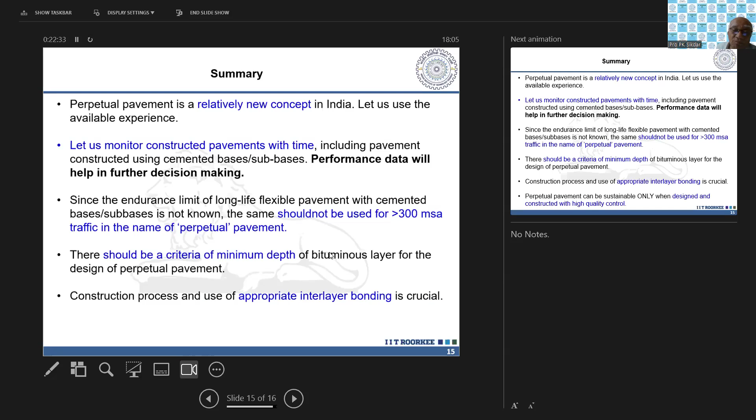Perpetual pavement can be sustainable only when we design and construct it with high quality control. This is the final statement from my side. With this, I would like to end the presentation.